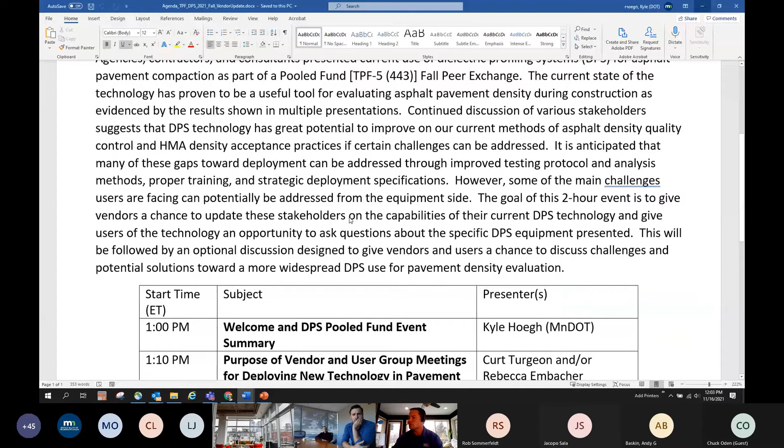So you should be seeing an agenda right now for the event today. What I did, I just put a few of the slides or the title slide for each of these different talks, just so I can get everybody up to speed on what was discussed last week and where we're at with the DPS through the pooled fund.

So like I said, we gave an update on the work plan progress, and Dr. Shongtao Dai did a great job with that. One of the main things, in addition to the operator certification and precision and bias, is getting an AASHTO specification for use of this technology as an agency for density acceptance.

That was a big focus of the morning session, and I gave a presentation on the current protocols that we're recommending through the pooled fund for that, which will become an AASHTO specification eventually, and then also some of the information that we're posting on our website, which I'll give a link to when I'm done with my update.

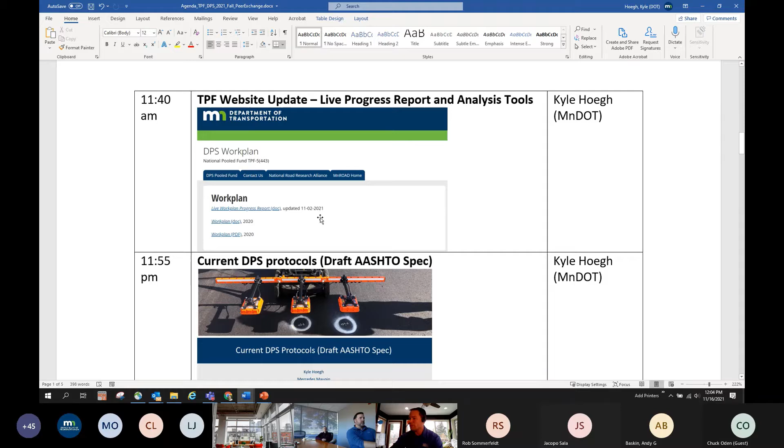We also are excited to have University of New Hampshire and also Adam Hand from University of Nevada joining the team, and they're going to take a fine-tooth comb to our protocols and also try to add a little bit more justifiable statistical analysis tools that'll put this technology over the top in terms of our ability to justify its use and what actually needs to be done from a protocol point of view to be able to use this technology to accept asphalt density in hot mix asphalt.

So they did an awesome job presenting some of the work they're going to be doing, and then they're also going to develop a couple technical briefs that'll help get people up to speed on what DPS is and what it can do for density analysis.

I gave a presentation on some of the stuff we're doing at MnDOT for our data collection and analysis, and the focus on that was a lot of the real-time analysis that you can do when you have the technology out there, but then also diving a little bit deeper into how we're checking the accuracy of our DPS predicted density versus what the cores are telling us out there.

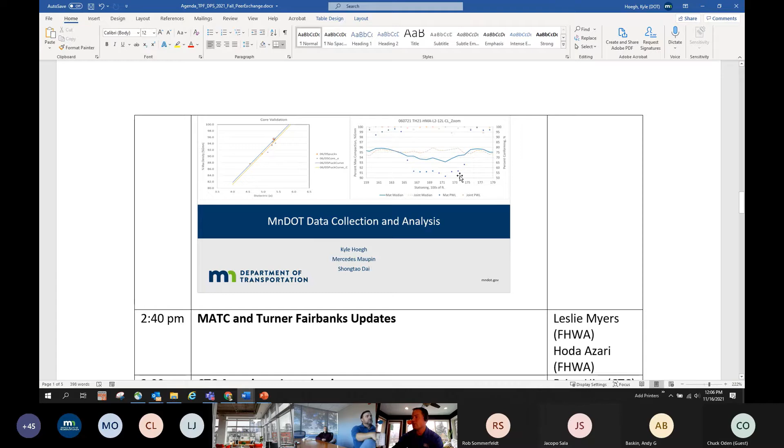And then also, once you have this conversion from dielectric to density, presenting a new kind of on-site tool where you can actually export summary statistics that give you percent conformance of the asphalt pavement. All of this stuff was posted, or will be posted, on our website, so you can get details of all these different presentations by going to the DPS Pooled Fund website.

NCAT is doing a large study. They're working on operator certification and equipment certification type activities, as well as precision and bias, and looking at some of the more detailed analysis, like how deep or how shallow the lift can be and still get a reliable dielectric from our surface reflection.

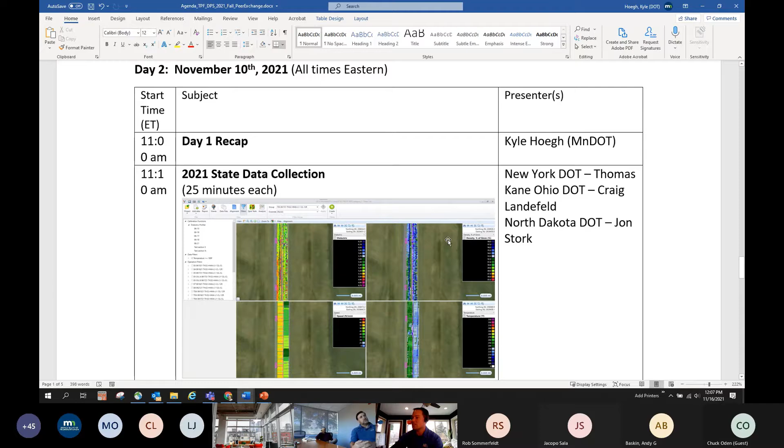Day 2 was a little bit more of a peer exchange than a project update, which was awesome. We got to get really good information on what the states are doing, and I just wanted to give an example of how quickly you can get up to speed with this technology.

New York and Ohio are some of the more advanced users, they've been using DPS for a while now and using it quite a bit. North Dakota has just started to ramp up their efforts and collected a lot of data this construction season, and they're already outputting density and Veda, which is a tool to combine DPS data with other intelligent construction technologies. Rebecca's group here at MnDOT helped them use the DPS and integrate it with some of the other intelligent construction tools out there.

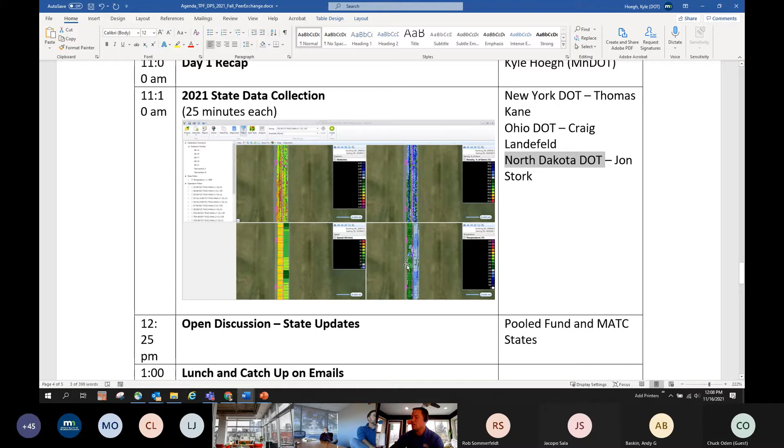I think this is temperature of the breakdown roller there presented.

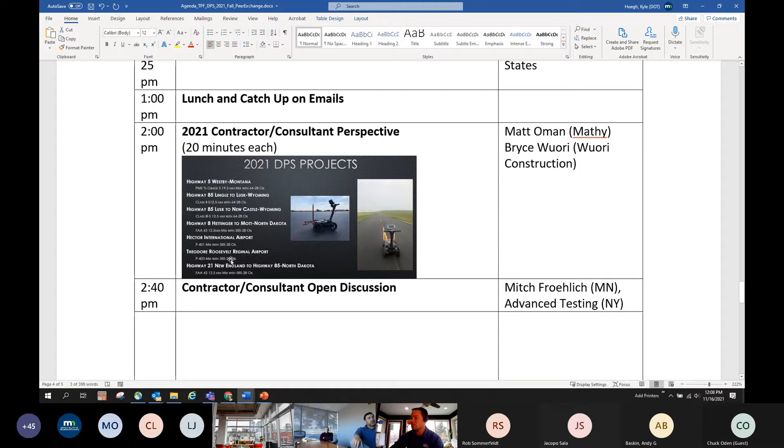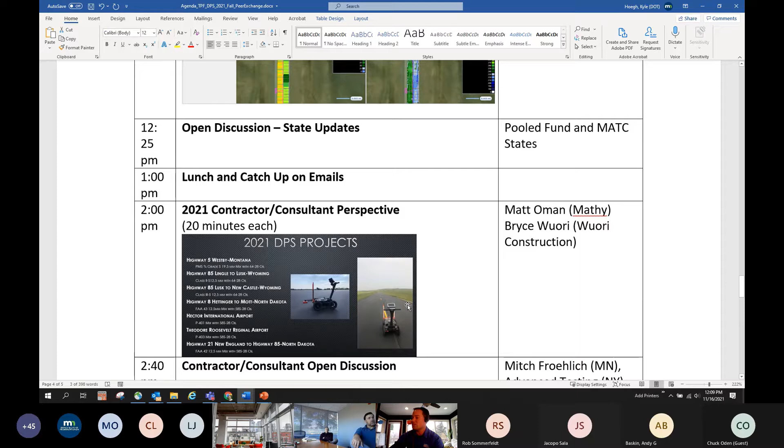It was really great to get the contractor perspectives last week. We're looking at it from a density acceptance point of view, which requires a lot of different steps that we talked about later on day 2. It was great to see contractors like Matt Oman with Mathy, and also a consultant, Bryce Wuori, who works with a bunch of contractors. You see all these different projects from different states that he was on, where you can also use this technology as a quality control tool for contractors, either looking at test strips to get your rolling patterns, that sort of thing. So that was great to hear from both Bryce and Matt, as well as Mitch Froehlich from Minnesota.

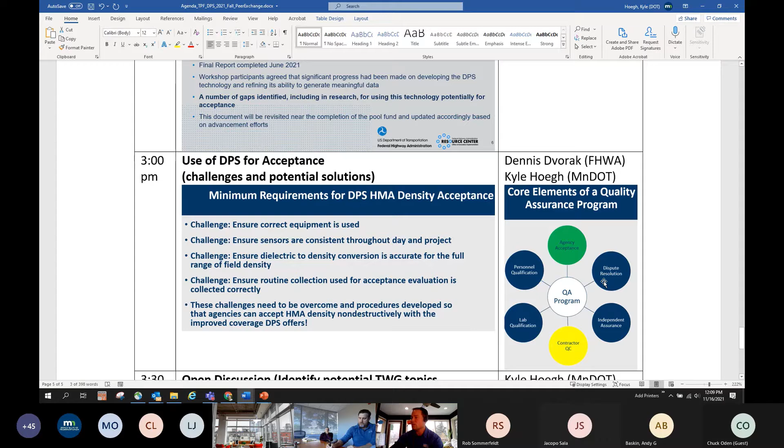And what it looks like from the core elements of your quality assurance program point of view. So overall, really successful couple days, I thought, and it ties in well with what we're trying to accomplish here, where we're getting the vendors and the users together to try to discuss some of these things.

Before I take any of Curt's time here, I just wanted to leave you with a little bit of perspective that our office director, Glenn Engstrom, always gives with new technology: that we need to make sure when we're evaluating this technology that we're not holding it to a higher standard than the existing methods we're applying. So in this case, we're comparing what is being presented here and where we're trying to go with this technology to the current state of the art, which a lot of times is spot checks with cores or a nuclear density gauge. So this is really exciting stuff that brings challenges, but also brings a lot of opportunities.

So with that, I'm going to pass it to Curt Turgeon. He's MnDOT State Pavement Engineer, also chair of an AASHTO committee that's critical to implementing a lot of these new intelligent construction technologies through the use of AASHTO specs, and also has a lot of experience with these user group meetings. So I wanted to let him give a little bit of perspective here before we get into the presentation. Go ahead, Curt.

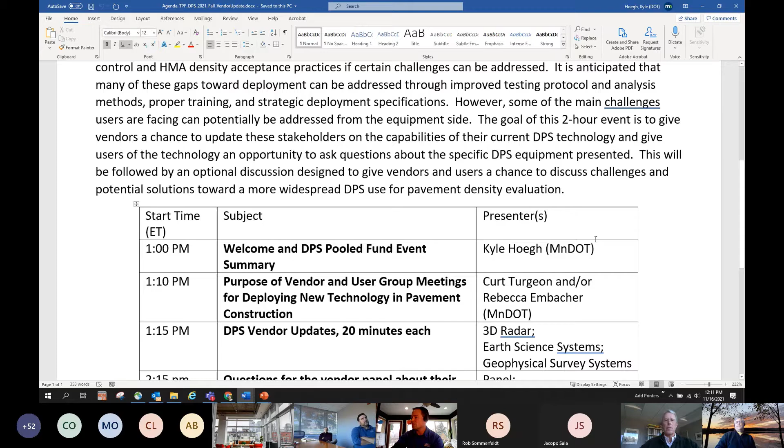Okay, I guess one of the things I want to remind people of is back in the SHRP2 program, this technology had a sister, which was thermal imaging behind the paver. And thermal imaging, we've fully implemented that. All of our paving projects have thermal imaging. A lot of the county projects have thermal imaging.

That started out with an idea at the Washington DOT, where they wrote a spec where they took a handheld temperature measuring device and took a measurement 1 foot apart, and decided that the high to low was an indication of something going wrong with the paver. They also realized that doing that right by a paver stop was not a good thing, because paver stops kind of screw up the temperature profile.

So that idea made its way to Texas. Texas DOT started playing with it. TTI showed up and said, well, why are you walking along doing this? We can automate that. So they built what's referred to as the PavIR bar, put 12 sensors on it and a bunch of wires, hung it off the back of the screed, and this new technology of thermal profiling was created. TTI doesn't sell stuff, so they talked to MOBA. MOBA is a company that builds things that hang on pavers, a lot of sonic sensors and other things, so they're used to dealing with low bid asphalt contractors.

Then I was listing the activities that we had done during 2019, which was a very first prototype software to do very quickly a calculation that could lead to dielectric values, and therefore we're with the idea of then converting everything to density. But also embedded in that is how do we calibrate the data in terms of having a metal plate 100% reflectivity reference. How do we do the reflectivity analysis, and so on, and then how do we go on with testing.

Then, after there were some images being shown, this is what we've done, and we came up with some challenges that we wanted then to solve. So the mechanical aspects, what happens because our system is vehicle mounted. So you have a lot of potential movements from the vehicle itself, from traveling at traffic speed, the mount of the system itself, and then there are also, of course, signal aspects like what happens when you have interference, how much does it impact your data, and how do we want to use the calibration data.

Should we refine the calibration procedure? And by that I mean not with the core samples, I mean the calibration - meaning passing from just amplitudes to reflectivity and therefore dielectric values. And then I went through some activities forecast, which required a lot more testing, a lot more algorithm development, and then creating some standards, some procedures, a workflow, and then arriving at least at an implementation within our software - so visualize the things within our commercial software.

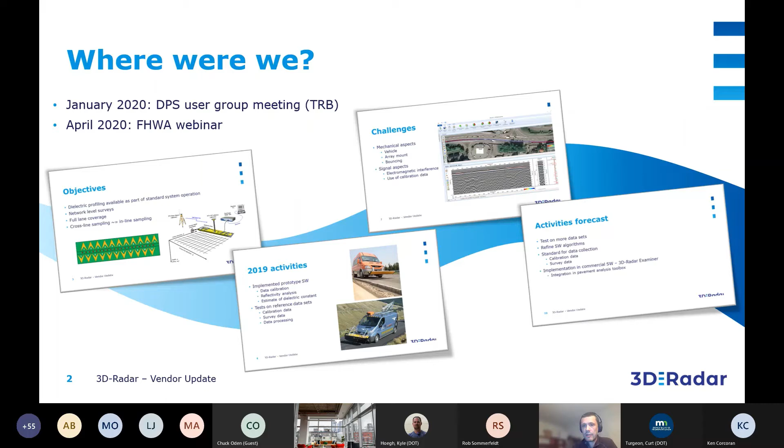That's where we were, and that's what we've done over the next couple of years up to now. We have finalized software algorithms, so we have a fully working prototype right now to arrive at the dielectric values, and it's fully automatic. There's also potential for real-time operation, so it doesn't require you to do any specific operation. You just get the data and the thing happens by itself.

The algorithm is really focused on our kind of technology, which is step frequency and array. So it's 3-dimensional and frequency domain type of radar. I don't want to go through that right now, but if you have questions about it, I'll be happy to answer them later on.

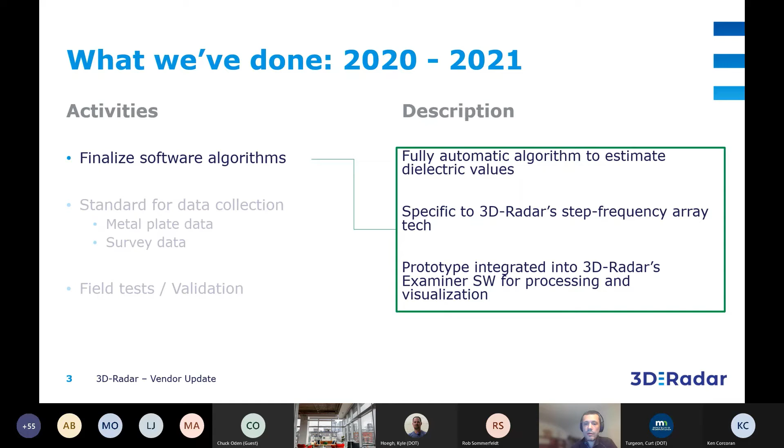We have also integrated this into Examiner. It's still a prototype, so it's not available if you install Examiner today, but we were able to embed it into the standard processing workflow, and with that, I mean also the visualization and so on.

We have gone through all the workflow specifics in terms of how you collect the metal plate data, this 100% reflectivity, and we really wanted to have this kind of data collected at factories when we create the antenna. So we've done a lot of testing associated with this. What happens if you use 100% reflectivity data that's one year old? We've done it, and the thing works well, because of the nature of the radar and how we programmed the entire thing. That was very good. We were very happy to see that.

Of course, you need to recollect this data if, for example, you need to repair the antenna, or after a while, but we haven't arrived at 3 years of testing for now. So that's where we are.

We were also able to create a standard for data collection, meaning you can go up to, for example, 45 miles per hour, roughly 70 kilometers per hour if you really have to, but still with a very dense grid, 3 inches by 3 inches, and using a fairly wide array, 2.1 meters, roughly 7 feet, with an effective scan width a little bit less than that, count between 6.5 foot to 7.

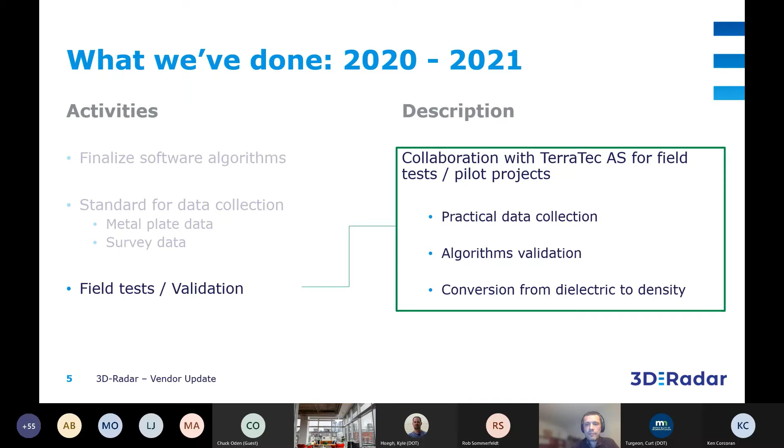So we differentiate a little bit, as you might have understood, compared to the other technologies and equipment that you're going to see. We call it internally dielectric mapping more than profiling, because what we produce is a three-dimensional image, or a two-dimensional image that is extrapolated from a three-dimensional data cube. We really focused on a different kind of solution, because it adapts better to our system.

So we still wanted to be vehicle mounted and have data collection at traffic speed, covering the entire width, as much width as possible, and to make it available as a standard within our tools for data collection and so on. This means that when you collect data for doing dielectric or density profiling and mapping with our system, you still have available the rest of the three-dimensional data set to perform standard operations like layer tracing, mapping of cables and cracks, and so on.

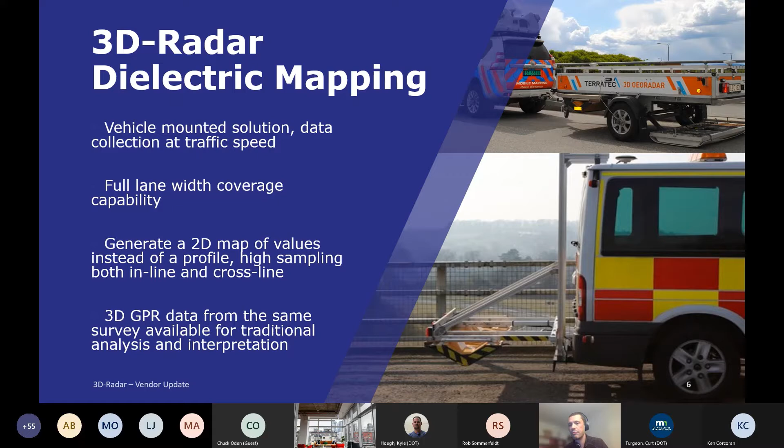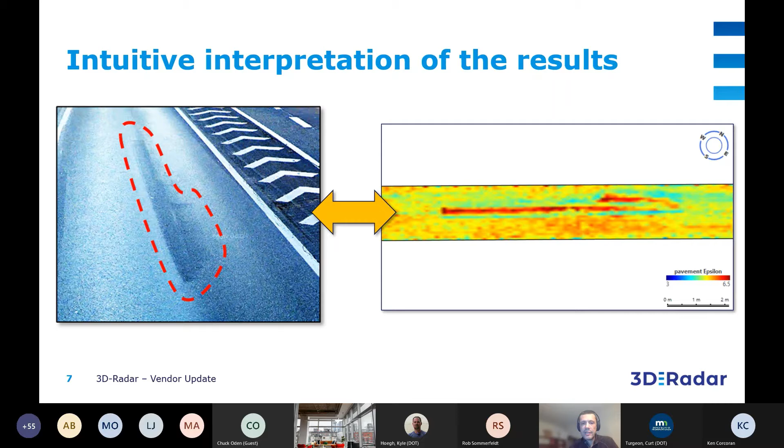What kind of advantages does it give to have cross-line sampling, similar to inline sampling? Well, you get an image that is the same resolution one way or the other, and therefore you can also trace.

I don't know if you can still see my screen because it's going a little bit black. Cal, can you see my screen? I can see your screen, but I don't see you scrolling anywhere. Are you trying to show a certain spot on the picture? No, my monitor went black for a second, so I wasn't sure you guys were still seeing it. But if you can see it now, for me it's fine. I can just maneuver from the left-hand side.

Anyways, it means that you can map longitudinal joints without necessarily moving the equipment from left to right in the road. You can collect that data at the same time.

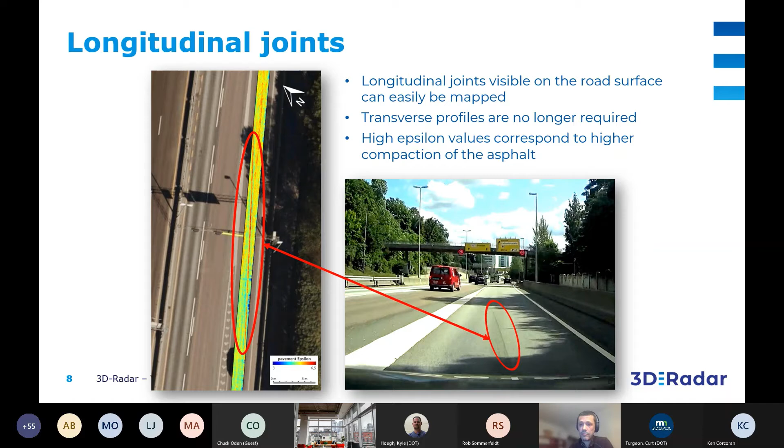I'm going to show some data out of that because it has some very recognizable features, to show you that the algorithm accounts for all the bouncing and everything else. The algorithm and the calibration procedure work with 100% effectivity.

Other things that are visible include the transition between newer asphalt and old asphalt and vice versa. Joints across the road are also very visible, of course. It's possible to see a phenomenon that happens here in Scandinavia, where you have a lot of rutting due to studded tires during winter. This does impact the results, so that was interesting to see.

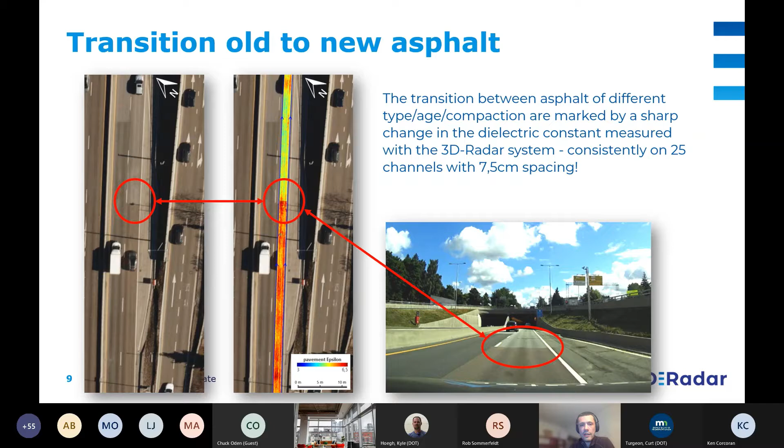This kind of focuses the waveform coming back, and we really get a very nice level of detail.

Apart from driving in traffic, TerraTec has also been doing some pilot projects, as I was mentioning. These are still under analysis, so I can show you some stuff, but without telling you exactly where or how or who. Here in the Nordics, they've done some testing in newly laid asphalt, done static tests, multiple passes, and they are now in the process of finding a correlation with enough cores.

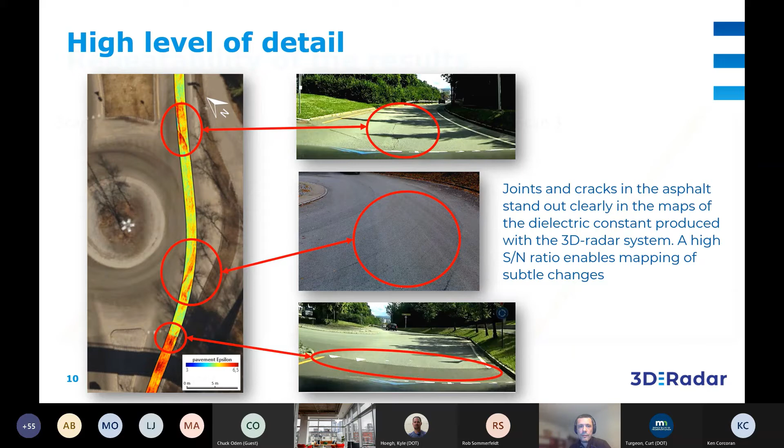There is some variability - perhaps you cannot even see it, but there is definitely some variability. Some of it we know why it happens, some of it is due to simply some error, some biasing error in the algorithm when creating color maps and such. But I can say I'm fairly happy with the results, and very happy to see how the different channels, the different antenna pairs - transmitter and receiver pairs across the array - are performing and giving back results.

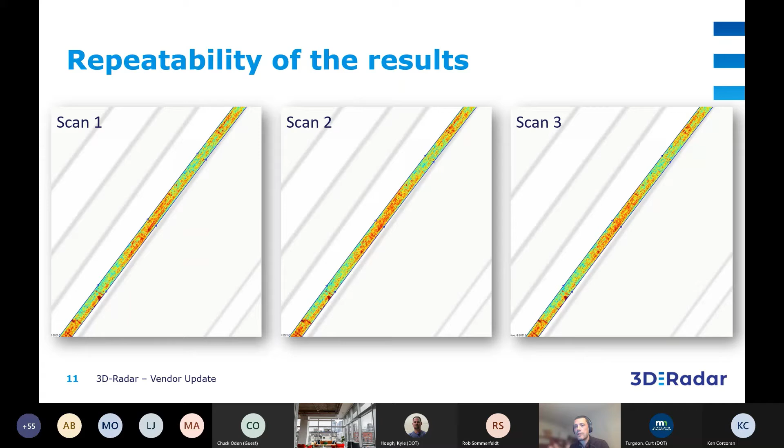Now going towards closing this already. As a matter of fact, I've been maybe fast.

I think the good news for us is that TerraTec has done a very good job trying to estimate the accuracy of the method, and they found the accuracy to be very good for both rolling measurements, so while driving, and standstill or static measurements. Based on the standard deviation they're seeing, the variation is as tiny as 0.02 to 0.04 in the dielectric value, which works very well for them. I believe it works very well for us, and for what I know, should work very well for you guys too.

I'm open to any kind of input. I have to admit they kind of forgot they were using a prototype most of the time. Most of the feedback I got was related to improving usability and the GUI level, but there is no real GUI for now on the software. It was more a prototypal GUI that would let you decide some parameters, just to make it a bit more maneuverable at this stage. But in terms of the results they got, it was very practical for them to use. They have a very good feeling for it, so I was very happy to hear that.

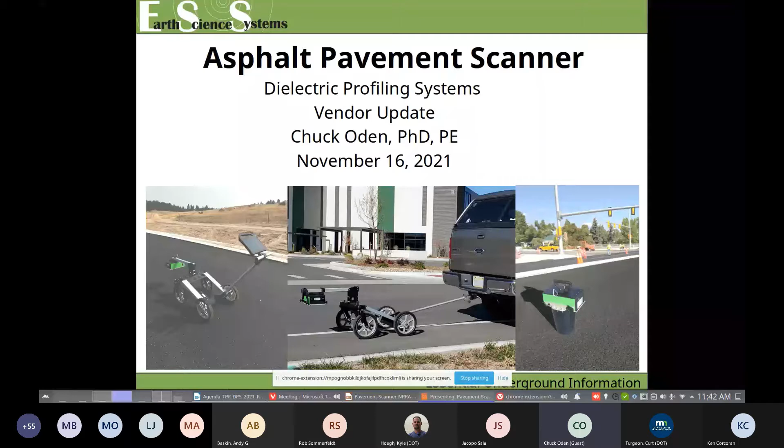This device measures dielectric constant, just like everybody else is doing. We're conforming to the AASHTO standard, and with a suitable mix calibration, we can get compaction and density, and that's literally the $1 million question, the thing that we really want to investigate a lot more. I'll have a lot more to say about that later on.

But this device also measures a few other things as well, such as asphalt thickness. It is a GPR after all. We measure the roughness of the pavement, and we have an IR temperature sensor.

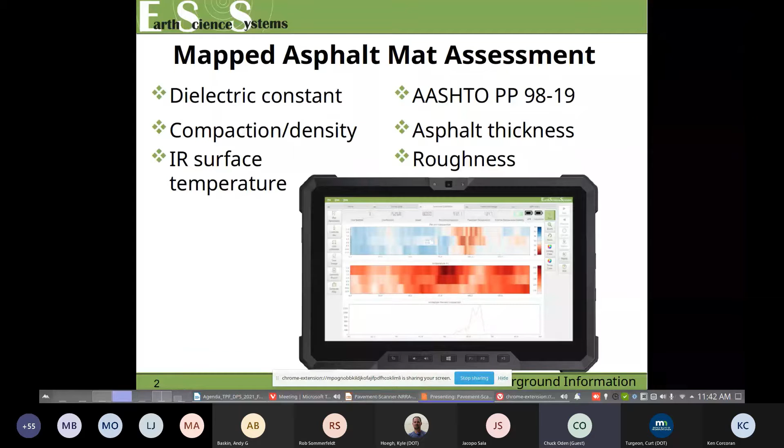So there's no cables. With everything that we've done here, we've tried really to get rid of all cables in all parts of the system because we just think that they're weak links.

I will mention that we've gone through a couple of changes on the cart over the last couple of years. We had some complaints early on with an earlier version of the cart where part of the calibration procedure is to lift up the scan head to essentially record the background waveform. We had a movable arm with a push pin, and you had to pull the pin and move the arm up, and that seemed a bit cumbersome. So we improved that arm, but even that was a little bit cumbersome.

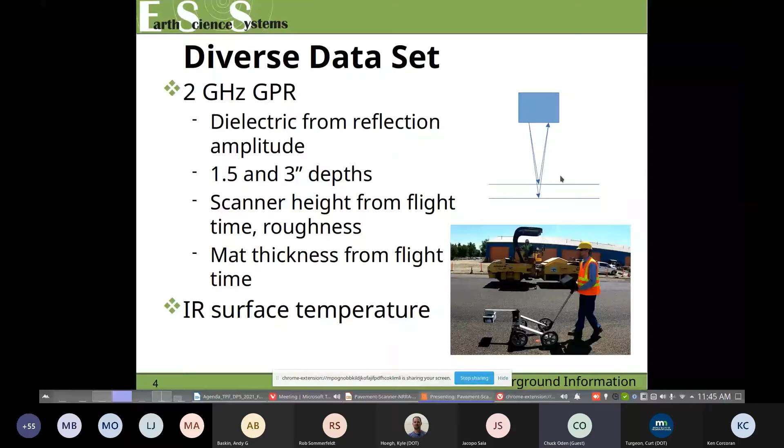We've also made a lot of improvements in the positioning system. There are two sensors for positioning. The first is the wheel odometer, very conventional, except that it's wireless. And we have a multi-band GPS that has a few different modes of operation. In the unaided mode, you have about 1 meter accuracy.

But we have a subscription. Users can subscribe to something called Point Perfect that works anywhere in the continental US and continental Europe, and we can get 3 to 6 centimeter accuracy with our GPS. That's anywhere, but you do have to have cell phone connectivity for this to work. The tablet has a cell phone modem in it, and we're downloading correction data from a server.

But anywhere there's cell phone connection, we can get this precise GPS, and you don't have to be near a base station. We do have an RTK GPS configuration. So if you have some NTRIP servers you like to use, or your own NTRIP server providing RTK base station information available over the internet, you can set up the software to pull down this NTRIP information, and you get 1 centimeter accuracy. But really, for this to work, you need to be within about 10 kilometers of a base station.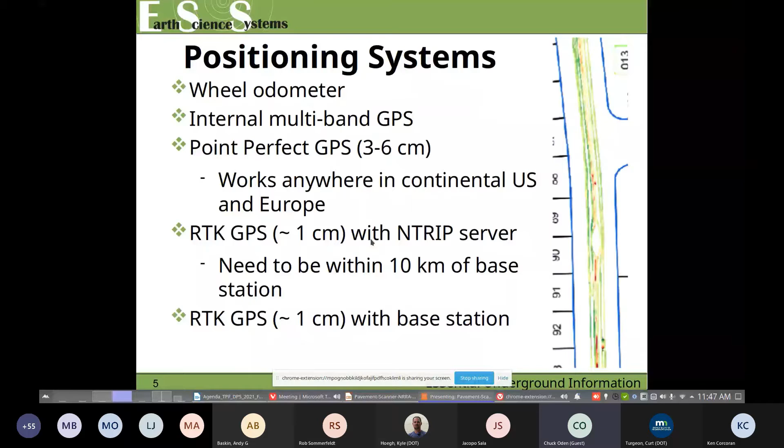We ask our users to set up survey grid lines, and we typically do 3 lines per lane. Users can elect to do as many lines per lane as they like. Our spot size is about 24 inches wide, so you can do a more dense grid if you like. For a 2-lane road like you see over here, we would typically do 7 lines, 3 in each lane, and then we always do a line right down the center along the joint. I'll show you some of that data, and I think it's pretty cool. As you can imagine, the joint compaction almost always is less than the middle of the lane.

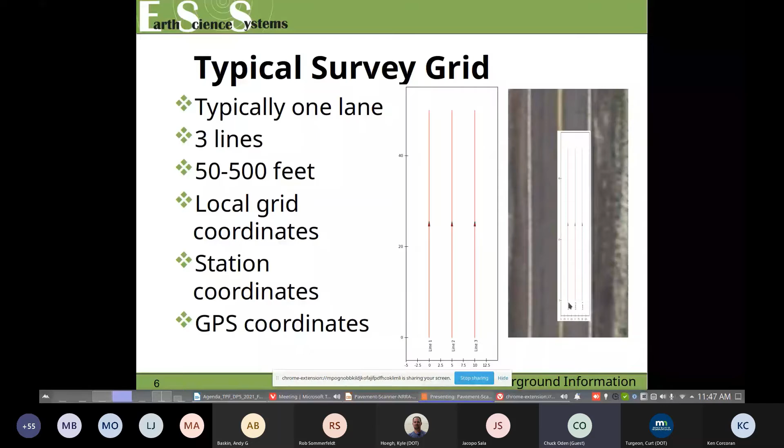Let me show you some data. This happens to be a new subdivision going in on the south side of Denver, and normally we would overlay the data on a Google map, but in this location Google Maps just has an open field, so we pulled the county's maps and overlaid our data there.

This is temperature. When we went out to do this survey, they had already done some paving the previous day, so you can see those roads are cold. But the 2 roads that show the warmer colors, you can see some variation there, some yellows and some reds. We don't know what these temperature anomalies really mean, but oftentimes, as most people here know, temperature anomalies correspond to problems like segregation. So what this would do in the field is, if you saw this on your screen, it would flag an area where people need to go look and see if there's something like segregation or something else going on causing this temperature anomaly.

I think that's all I wanted to say there. Here's compaction, and we'll look more closely at it. We're kind of zoomed out here, so it's hard to see what's going on, but we'll look more closely at compaction in a couple other slides. You can see these 2 roads were done at the end of the day, and maybe they wanted to get out of there, I don't really know what's going on. You can also see the line down the middle, it's a different color. The joint just exhibits worse compaction, which is a pretty common occurrence.

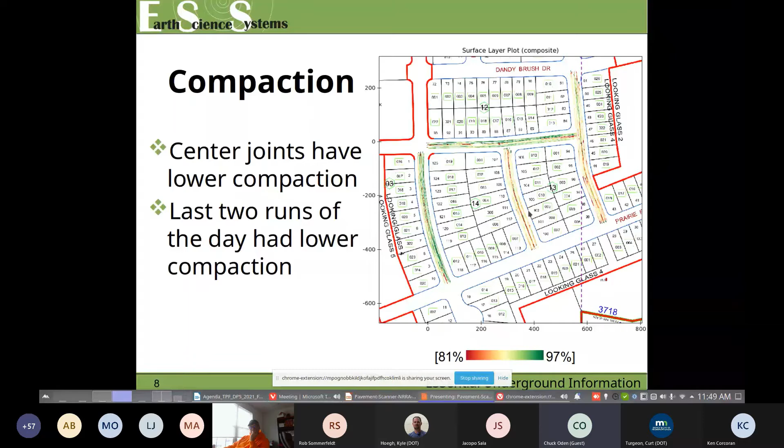So let's look at this in a little bit more detail. Here, if we take all of the data - this is a 2-lane road, we did 7 lines on this road, 3 in each lane and 1 along the joint. If we take all those scans and join them together, you can see the values for the joint are actually a lot lower.

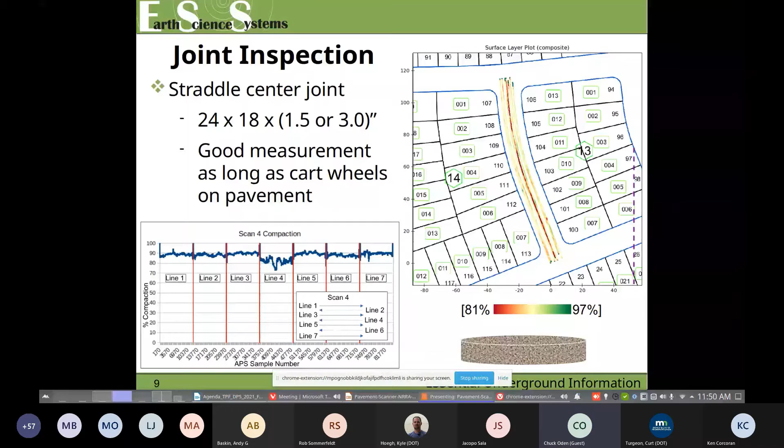And the configuration of our cart actually works quite well for straddling a joint between lanes. We're getting a valid measurement as long as all the wheels of the cart are on top of the mat.

So we think this is a pretty valuable measurement. We do have the gauge mode. I'm not going to talk too much about that today, other than to say that you can pull the scan head off the cart and put this coupling cone on it and take some spot measurements, and you could do some joint inspection that way if you like as well.

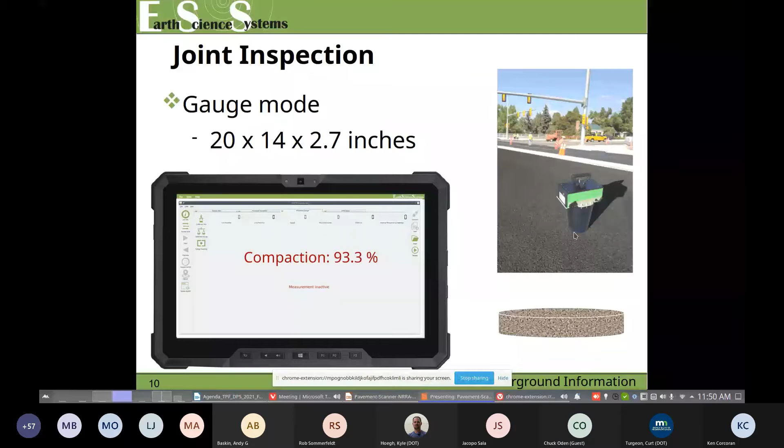Here's a roughness display, and again, this is just derived by looking at the changing scan head height. And so this measurement is sort of similar to a dipstick profiler. It's a little bit different.

We started out wanting to make an IRI measurement, an International Roughness Index measurement, but it turns out our wheelbase really is a little bit too short to detect those long period undulations that would be detected by a larger apparatus like the California profilometer. But nevertheless, we kind of back off of calling this IRI. We may try to revisit this, but nevertheless, it's a really good indicator.

It is a measure of roughness, but it's not something that can be used for acceptance testing.

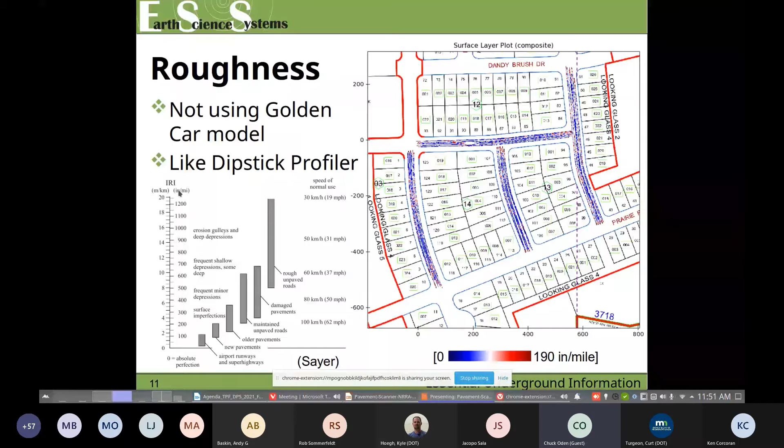And then, of course, thickness. It is a radar, and so this is a B scan. I think most people here have seen radar B scans. We can pick this - this is the top surface of the asphalt, this is the bottom of the asphalt, and we pick this horizon here, measure the travel time, and can calculate the thickness.

In this example, we can also see the subgrade here. And then you can see in the map over here that there are some thin places, definitely some thin places here. So this is pretty interesting that we can get all of this information from the data that we collect from a single pass of the scan head.

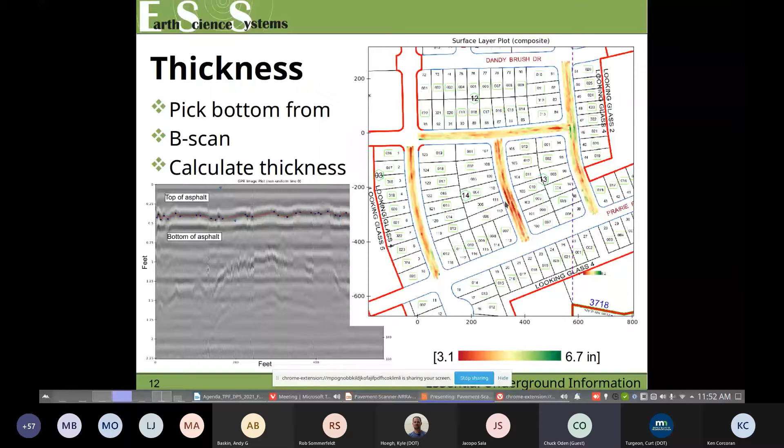Okay, next, I think this topic is something that everybody is probably most interested in, and that's how to move from dielectric constant to compaction.

And we really try to use this mixing formula, the Böttcher mixing formula. Leng's PhD thesis from Illinois really went through this in a lot of detail. And if we know the dielectric constant of our constituents and we know the volume fraction of our constituents, we can calculate the dielectric constant of the mix.

And this relationship is essentially linear. So really, theoretically, we would only need one data point to figure out which of these lines we're going to use.

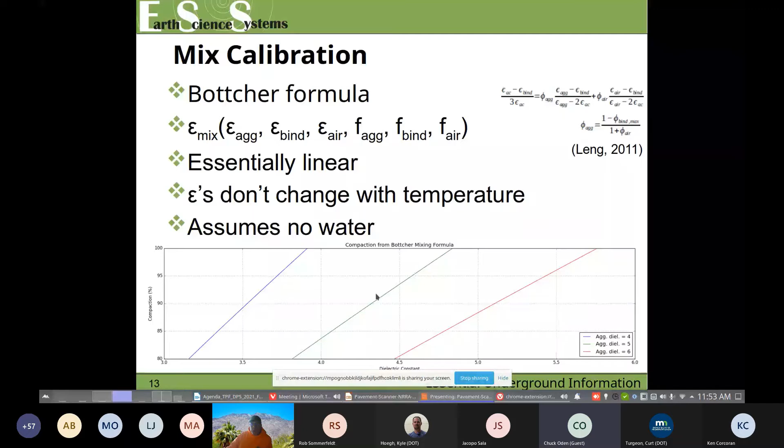Now, there's no error with one data point - we can't calculate standard deviations or anything like that. So we like to have more than one data point to calibrate with this formula. But since inherently the relationship between dielectric constant and compaction is almost linear, we just use this formula, and depending on what we use to calibrate with, we can get away with just a few different points.

So the method that we really like to use, the most accurate method, is to calibrate using gyratory pucks. And so this is the setup we have. We take the scan head off, and we put this long coupling cone on here, and we measure the dielectric constant of a gyratory puck.

Well, the reason we really like this is there's a number of reasons. One, it's very accurate - we get a very accurate measurement of the dielectric constant, but we're also essentially testing with our radar wave the entire volume of this puck. And the entire volume of that puck is what is used when you're determining the compaction or density with some other method, with the standard laboratory measurements, say AASHTO T312, or some other methods. So it's really an apples to apples comparison.

The accuracy is very good, and with just a few gyratory pucks combined with the Bottcher mixing rule, we come up with a pretty good mix calibration. A lot of people try to use gauges, and I'm not going to say don't use gauges, but let's really be cognizant of the issues when using a gauge.

So the volume of investigation of a nuclear gauge is, we'll just say, a hemisphere of about a 4-inch radius, and that volume is really not so different than the scale of heterogeneity of asphalt. If you take a nuclear gauge, take a reading at a certain place, and move it over just a few centimeters, a few inches, oftentimes the readings change by a couple of percent.

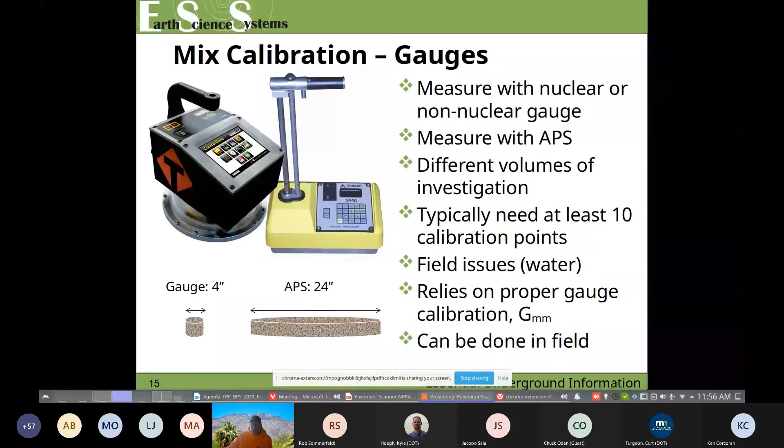So really, I think this might be coming towards the end, but at the end of the survey, what are the questions we want to ask ourselves to ensure that we have a quality survey and an accurate survey? Well, the first thing we tell people is to do some repeat measurements at the same locations, and if the numbers are the same, of course we would say that's a quality survey. If they're not the same, let's investigate some of the reasons that the numbers might not be the same.

Number one, we can talk about the calibration of the scan head. Our scan head, we've done a lot of work to put in a lot of temperature dependent calibrations, and we don't have to calibrate with a metal plate, but what you can do is take the scan head off, and we provide a dielectric standard, and you can put the scan head over this dielectric standard and make sure it reads the right number. And we haven't had any not read the right number to date, but you can verify that the scan head is actually measuring the dielectric constant properly.

So if we take away dielectric drift issues, if you will, what else could cause the repeat readings to change? Well, if there's water present and the temperature changes, we know that the dielectric constant of water is temperature dependent. So if the temperature of the asphalt is different than the first time you measured it, and then the dielectric constant that you measure is different, that's a good indicator of water, or it could be an indicator that you have water and a different amount of water between the two measurements.

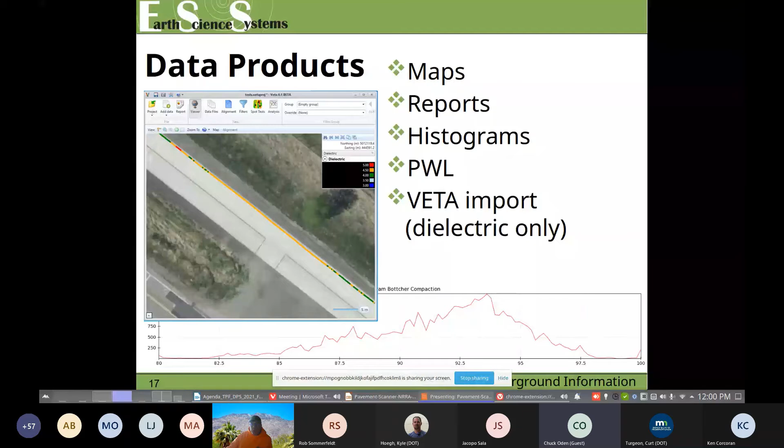So that's really my presentation. I think we've got a very flexible scanner. It's very lightweight. It has 3 different deployment configurations, so that's a lot of flexibility, and I think this really is a rich data set that we're collecting.

So thank you all for your attention, and thank you for putting up with my voice. I'm glad I made it through. Yeah, it worked well, Chuck.

I could understand you well, but I could definitely tell you had a little bit of a cold there, so thanks for powering through. Yeah, nice work.

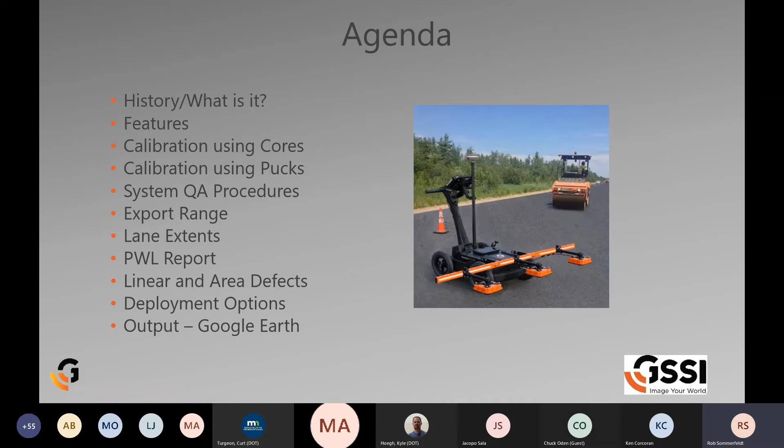So the history on how it started with the DOT, way back, SHRP 1, and then a lot of research and R&D with TTI, MnDOT, and many others, especially some newer ones that have come on board in the last 5 years or so - New York DOT, North Dakota has been very helpful, Maine, Nebraska, Maryland, and Florida. A lot of people have been very helpful. So the SHRP 2 initiative is where we are now, moving forward with this. Next slide, please.

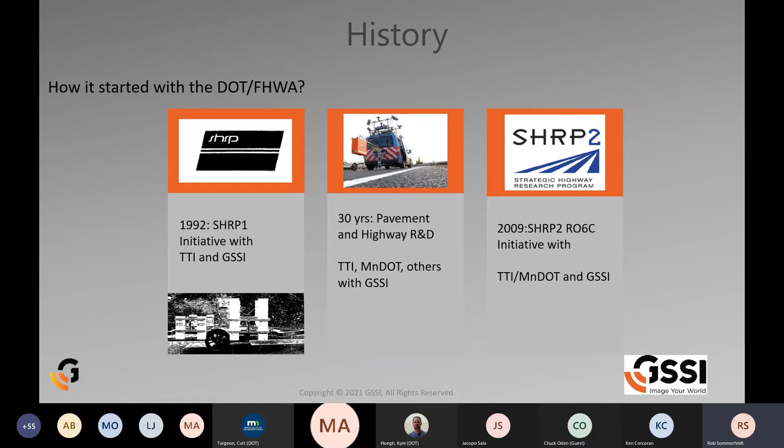So what is PaveScan? It is a continuous full coverage system, being on a cart or whatever mobile device you use to collect data, doing full coverage as the 3D radar and the Earth Science System showed. It provides on-site dielectric values of newly laid and compacted asphalt, as everyone has talked about. We provide real-time on-site a 2D contour map showing uniformity of dielectric values, and also coring locations. Through calibrations, whether with cores or pucks, which we'll explain later, we allow on-site display of density information - whether you choose density, percent compaction, or percent void content, whatever the user chooses. So we can do that in real time on-site, with the conversion done. Next slide, please.

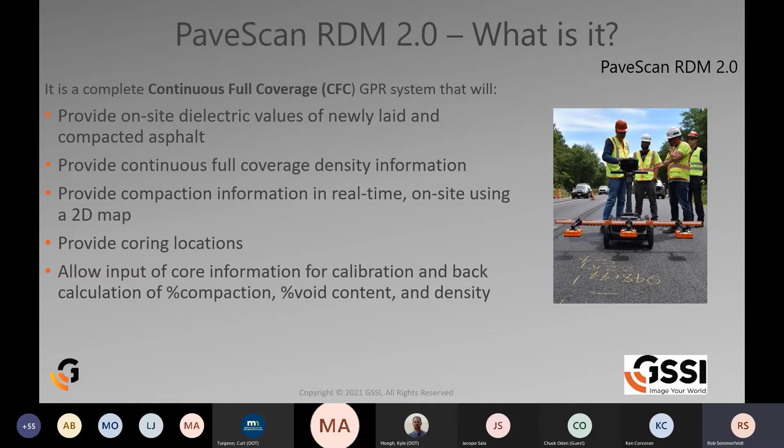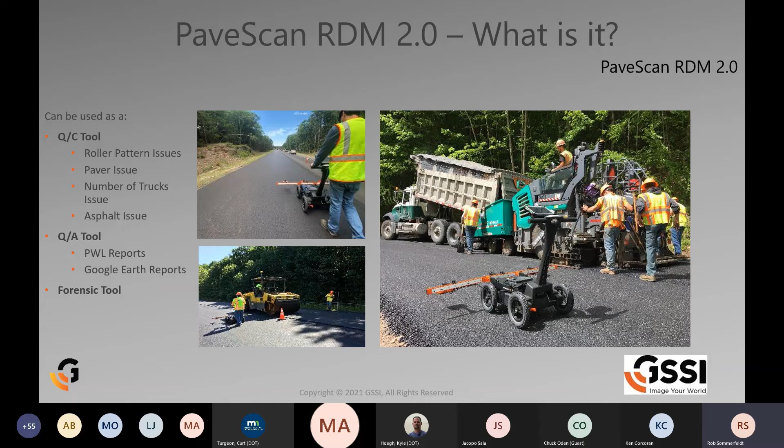Sticking with this, it can be a QC tool. I've been on many sites, Texas and a few others, where we've rolled this thing behind a finish roller, in front of a finish roller, up the road, side to side, and discovered patterns like roller issues, paver issues, certain sections not meeting density requirements, number of trucks issues - all kinds of things. So a lot of decisions can be made on site if there are any issues during data collection. As a QA tool, we've got PWL reports, Google Earth type reports. It can also be a forensic tool - for example, if sections need to be ripped up, it may not have to be an entire section; we can find the border or area where it didn't meet specification, so a smaller area can be ripped up instead of an entire section. Next slide, please.

Some of the features we've had - we do have the folding arms. No tools really required as far as assembly and mobilizing this to a job site. The arms fold up fairly easily and well.

Sensors can attach and detach very easily, no tools required. Hot swappable batteries as well.

Another thing we have is that green laser, the lower right hand picture, from each sensor. It provides two different things: it could aid in location accuracy, like if you want to get the dielectric or density of a core area, put it in time mode, and have that laser at that precise location. And the other thing is for guidance when collecting data.

You can put a green laser down 6 inches from a joint, for example, and walk along, kind of eyeball it, and use it as a guide. Next one, please.

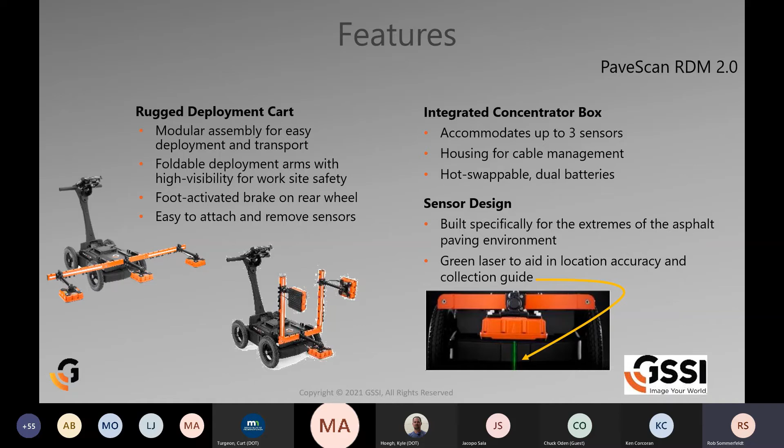This is what we do provide on site. If you can just press a button, it will kind of draw itself out. As you go across, if there are areas of lower density, that means there are more air voids, and air being the dielectric of 1, the dielectric of the asphalt will certainly be lower than other areas.

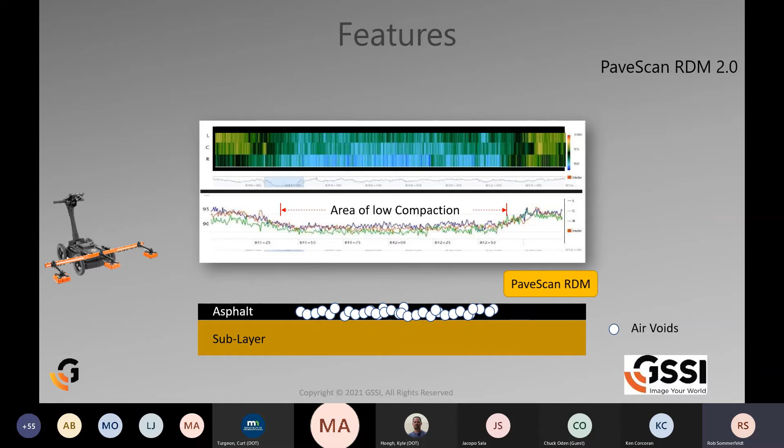A couple of ways of collecting data - we do have a 3-channel system, and depending on the state and DOTs I've gone to, they do a 2-pass system, and some have done 3 or 4-pass systems.

They've really done a lot of data collection, where you go up one side of a lane and come back down the other side, basically getting near full coverage as far as side-to-side data. Or like in Georgia, they do - or have done, I don't know if they've changed - a 1-pass system where they basically go down the middle of the lane and collect data from that. Next slide, please.

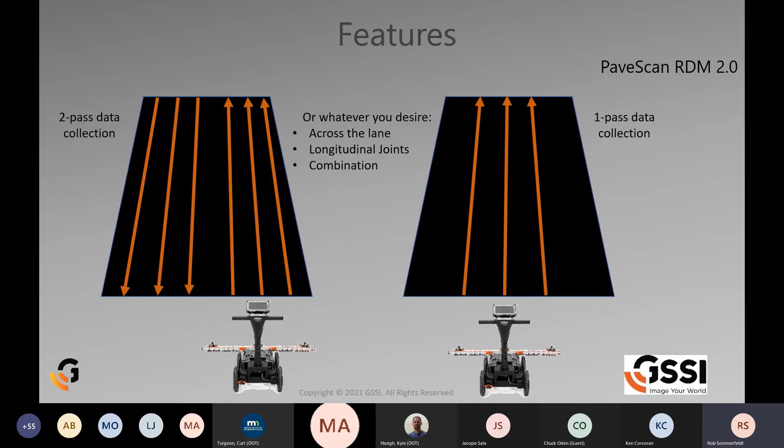So one of the ways we do things, whether it's from the test strip or when on a job site, you can collect data on day 1. When you collect data, you get dielectric information, and then we either provide the core locations, or you can do some coring, and we get the dielectric of those locations. Then cores are pulled after dielectric is collected of each location.

The cores are taken back to get density information, and then that information is entered as a calibration file. Our system allows saving multiple mixes, so you give that calibration a mix name. Therefore, if you use the same mix later, you can bypass this calibration, just pick that mix, and we'll automatically show density information from there. So we'll save multiple mixes for you.

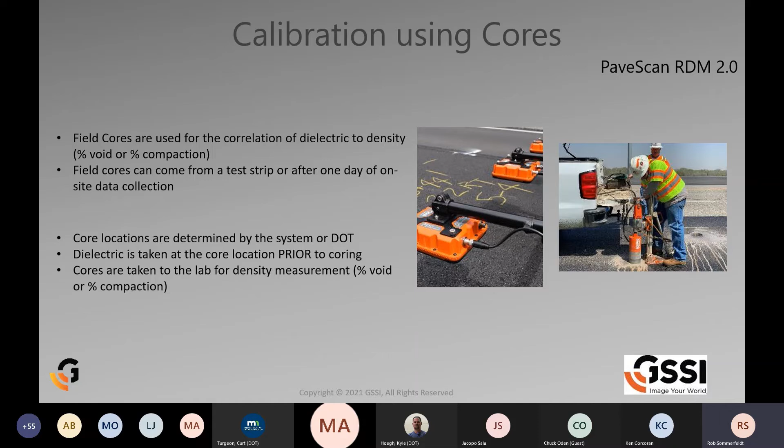Also, when you collect data afterwards, we do back calculate so that when you export the data, you'll get your density information using cores. Next slide, please.

So you input this information - we've gotten many, a lot of data points. We've done this for how many years now, and we get a pretty good R-squared number continuously. When I go on site, it's usually like 0.95, the trend line is high, 0.95 or higher. One time I got 0.88 and I was disappointed, but that's still pretty good.

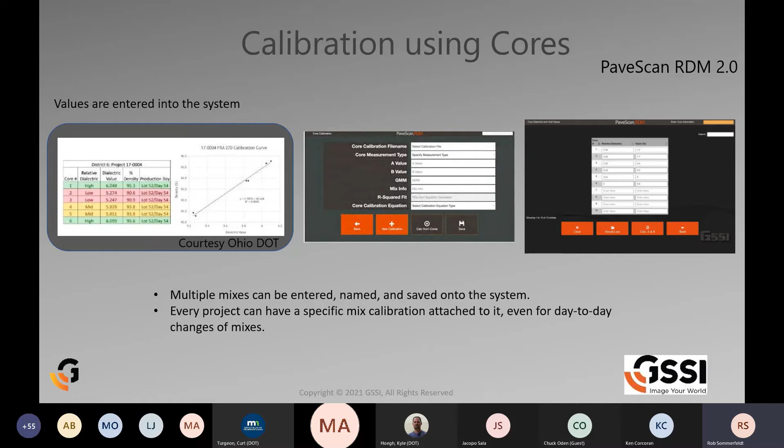We usually get very good correlation between density and the dielectric we get on site with the cores. Those are just some screenshots, in the middle and on the right, of the type of information you enter into our system. Next slide, please.

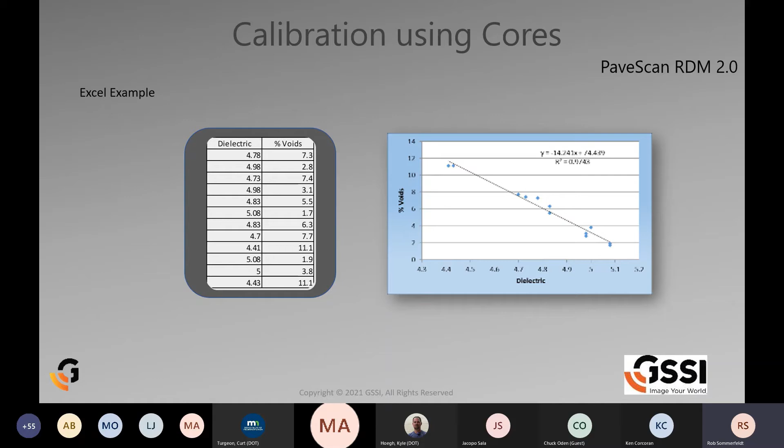And again, just showing some R-squared. I use Excel, most people do, but we calculate that automatically for you, the formula and the trend line, in our system. So all you have to do is put in the dielectric and the density numbers, and we'll do all the calculations for you. I'm an Excel freak, so I like to do them in Excel as well.

The other way we do calibration is using gyratory pucks, or biscuits, or pills, whatever state you're in and whatever they decide to term it. We use these pucks that we get directly from the plant at certain different densities, and we get the dielectric of each puck. There's a known density to those, and by that we can actually calibrate the system prior to any job site so that you can have real-time density information from day one.

And again, same thing with cores. We save the mixes, so if you have several different mixes, you can save each calibration with the name of the mix. Then in the future, you can just pull up the mix and connect that to each project.

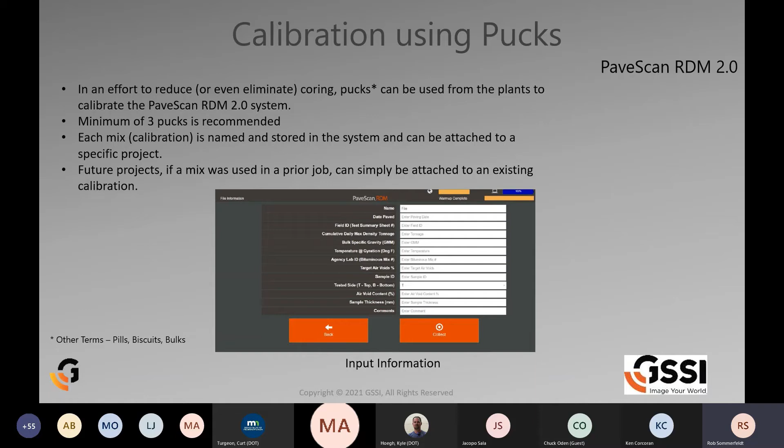I'm sorry, I forgot, Ken, can you tell me what slide you're on right now? My bad. Looks like you were on slide 13. Okay, so yeah, the pictures of each of the pucks, the 4 pictures?

That's correct. Okay, next slide please. That's a screenshot again of what gets collected and saved of the dielectric, density, thickness of the pucks, etc. And then again, all that information gets put into our system, and automatically we calculate the formula for you, and then you name it as a mix, and for each project you go out there, you just connect a mix calibration to your job.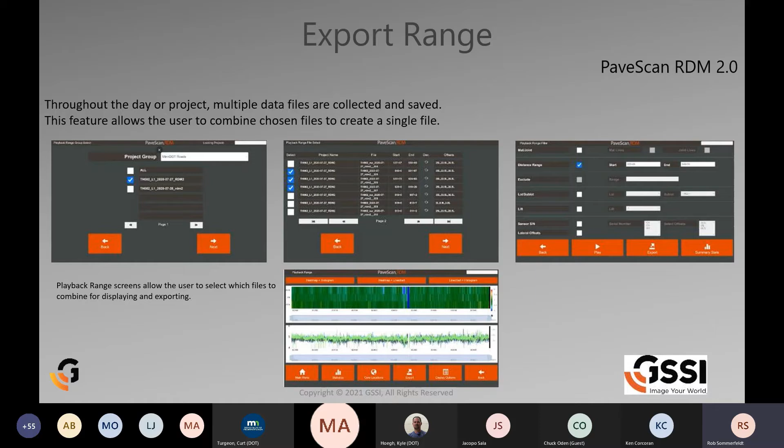Those exports do include a .csv file, which has tons of information, as well as a .kml file for Google Earth purposes. Whether you use dielectric only, that's what gets exported. But if you have done a calibration, you can get density information with that, so you can display or graph whatever density information you want.

Lane extents - what we've done now for the PWL, we do percent within limits reports now, where we allow the user to define where the joint is, like how far the asphalt should be within the joints, and then what's the main mat area, and whether the joints were confined or anything like this. So you can define the area where the joint mat is, as well as the regular mat, and then produce different reports for PWL.

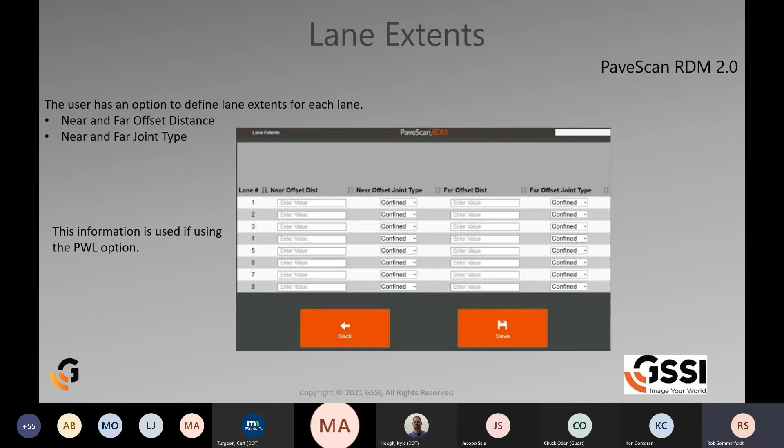These are examples of a PWL report that you can do with the lane extents and the information the user puts in to define the lanes within the lane, define the sections within the lane, and produce these type of reports that you can see on the right.

And again, I'm sorry Ken, what's on the screen? I keep forgetting, next screen. You're on 19. Yep, these are the PWL reports. Thank you, Ken, for keeping up with me.

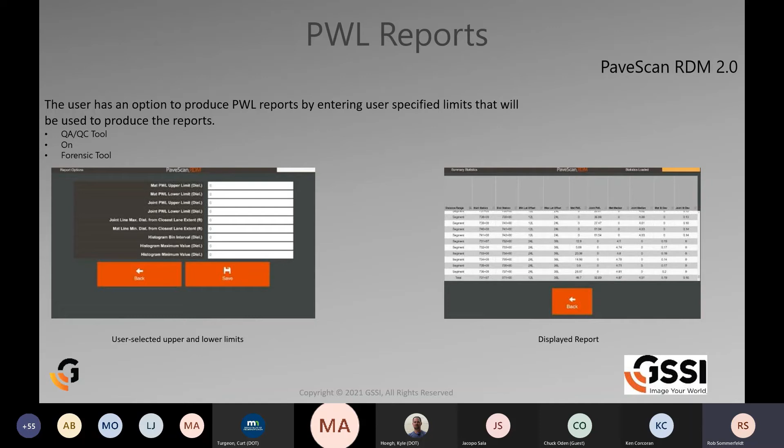Next slide, 20 please. These are examples of the CSV file. Sorry, it's a little small, but just to give you an example of all the PWL reports. From these type of reports, the percentages that were within the specs that the user gets to define, and then you can decide what to do with those numbers with the PWL reports. Next slide, 21 please.

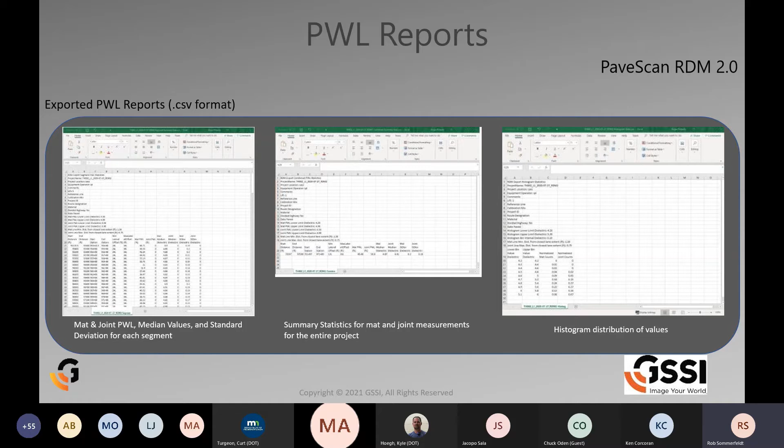Linear and area defects - one of the things I think is, believe it or not, an easy thing, but a big deal. That's a lot of data. We're collecting a heck of a lot of data, including the range reports and range outputs. That's a lot of data to scroll through. I put a lot of things in Excel, and I usually have to set up filters, copy and paste the data over to another sheet, and all kinds of different things. So what we've come up with is allowing the user to input information on what is defined as a defect.

Things that are out of specifications - we allow the user to define that so that when we export data, another part we export is for linear defects, where if the specs weren't met for a certain distance, a minimum distance that the user inputs, it will output that information, just that information.

Area defects, like a 100-foot square area or whatever the user defines, an area of a defect. We don't want, say, a 1 foot by 1 foot area to count as a defect. So we allow the user to define what the area is, square footage wise, that's considered an area of defect. You put that information in and export the data.

Next slide please - and you get information of just defects, and you get a KML file on the right, and you can see the little red areas where the defects were. That helps you define immediately exactly where, you know, rollers or the paver stopped, and all that type of information.

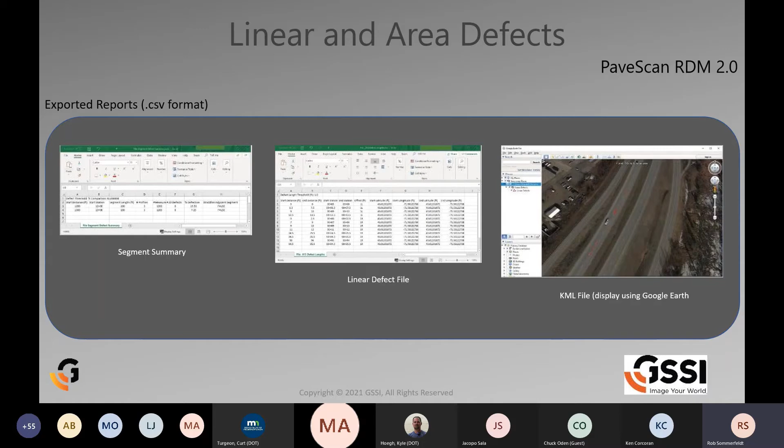Deployment options - we are developing some ways, and we've been doing all sorts of different things to deploy this, using a vehicle, whether it's a van or golf cart. I believe Georgia DOT has put theirs on a golf cart, and Minnesota's done tons of different things.

We've also played with the Segway, and we actually have a mounting system - you'd get your own Segway, but we have a little mounting system that lets you attach a Segway to the back of the cart so you can zoom along instead of doing all that walking out there.

So we've actually collected data on site. Ken is enjoying this Segway quite a bit, and he's doing a great job collecting data - I'll show you some. And we've done this robot, where you put in some GPS coordinates, or you control it, and let the robot go while you watch it go back and forth. We've been able to collect more data this way, going back and forth with smaller equipment.

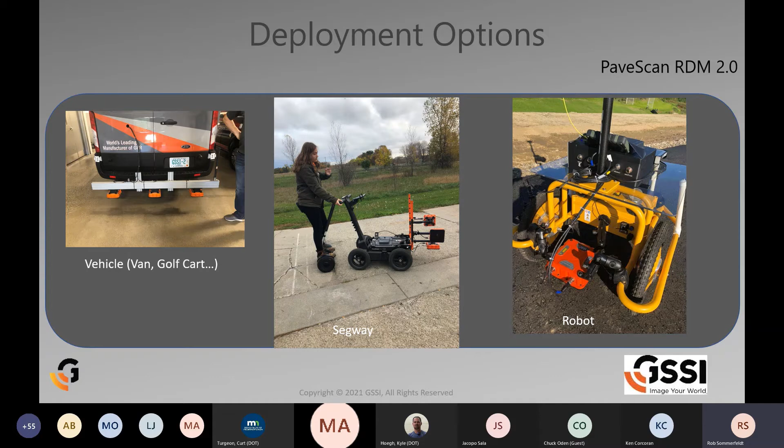With these deployment options, we've collected a lot more data. Ken, I can't remember if you collected this with the Segway or if this was robot data? This is Segway - Ken has too much fun with the Segway, but this is a lot of data we were able to collect in a short period of time.

You can see this is Route 3 in New Hampshire, I believe, which was one example.

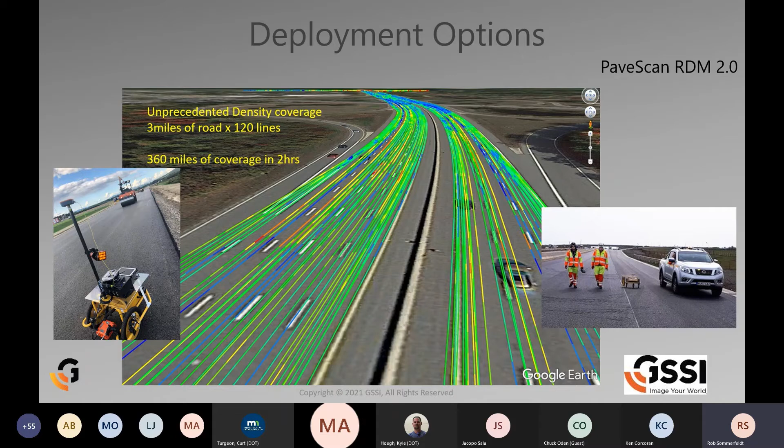Again, with Google Earth you can get a lot of information, and contractors write some amazing notes out there about where the paver stopped or what may have occurred during that time. On the right side is bridge data, which is usually lower density. I believe Richard Giesel's doing something to improve that, using the PaveScan to help with that information.

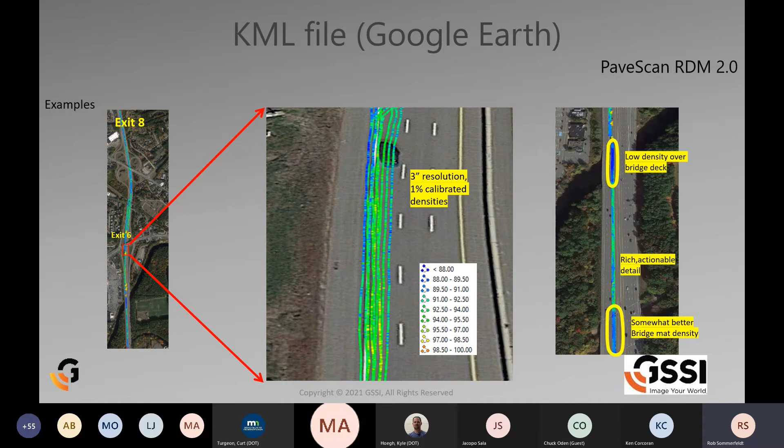This is Google Earth output we can produce using the RDM output, and again the contractor really does take good notes about what happened - a roller sat there, or all kinds of different things that may have occurred during the job site.

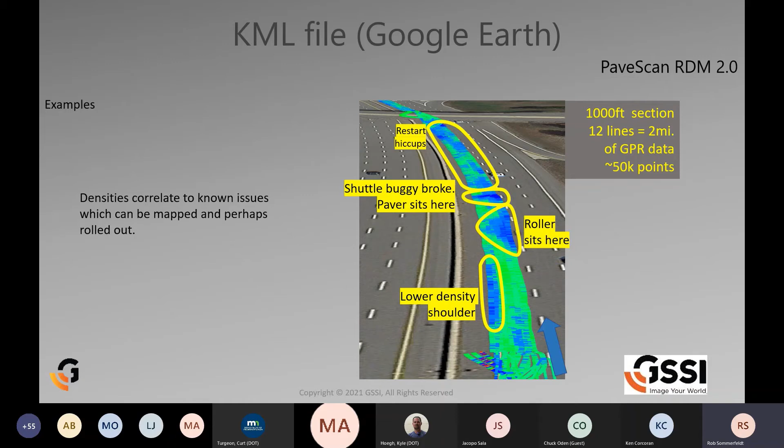And of course we do output the data - we output PWL files, KML files, and we could also see IR, where you see a small strip at the bottom where it was cooler, showing where the PaveScan system indicated lower density in that area.

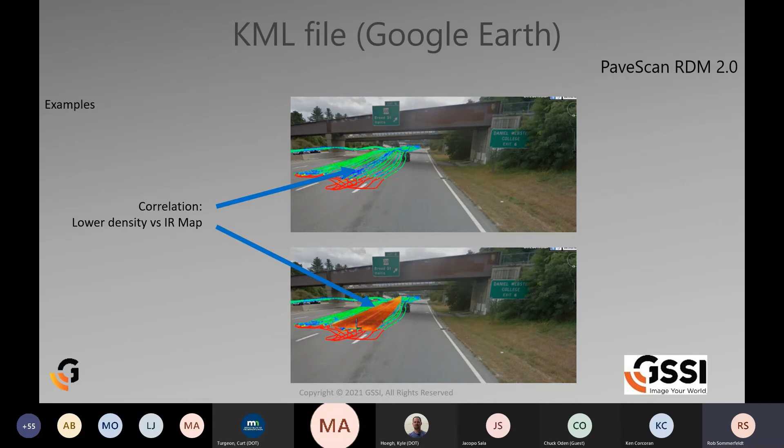That's the last slide, and two minutes is up - so thank you very much. Again, thank you Kyle, thank you Ken. I appreciate it, I'm glad this worked out very well.

Very good, thank you for showing your teamwork, GSSI, and the teamwork of passing the baton on the presentation slides and all that. Great work with what you've been doing with the technology - thanks for sharing.

We do have some flexibility in our schedule - the last half hour is designated for discussion. I think we'll try to make it through all the questions that have come through the chat, starting at the top. I'll open all the questions to all the vendors if they have anything to add. The first question was from Irv - glad to have him with us, he's got a ton of experience. Irv was asking Jacopo: how long after paving were the measurements made on the new pavement you were showing?

Yes, I tried to search for that information in the meanwhile, since I haven't collected that data myself. I can certainly find it, but I believe it was some months, without being extremely precise. It was not immediately after it was laid down, or something like that.

Okay, not to continue on the data collection questions which you weren't part of, but do you recollect any feedback on whether you were able to deploy the method on fresh pavement, or is the means of data collection conducive to going on freshly placed pavement after the final roller, or is it hard to say at this point? A bit hard to say, perhaps not with the vehicle, just for practicality, but I think a solution can be found in general.